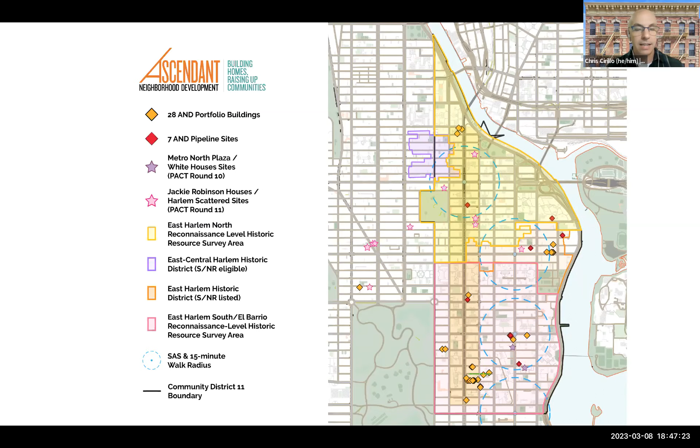And so for the Share NYC project, we are partnered with another nonprofit organization called the Ali Forney Center. Ali Forney is the largest nonprofit provider of services to LGBTQ youth in the country, and certainly in the city.

They provide social services. They run a drop-in center for young people. They operate transitional housing, and they are increasingly getting involved in providing permanent supportive housing for the populations that they serve. And so we have been working with them for several years to develop the proposal for the project that we're presenting this evening.

Just a little bit more about Ali Forney. Unfortunately, we weren't able to have someone from Ali Forney attend this evening, but we will make sure that someone from Ali Forney is here when we're back during the ULURP process to answer any specific questions that the committee may have about their programs and services.

So a little bit of the background about this project.

So the site, 244 East 106th Street, is a vacant lot that Ascendant owns. It was sold to us as part of a cluster of 3 buildings that we acquired in the mid-1990s from HPD through an HPD rehabilitation program. Those 3 buildings with a total of 20 apartments were rehabilitated by Ascendant in the mid-90s and have been operated since then as affordable rental housing.

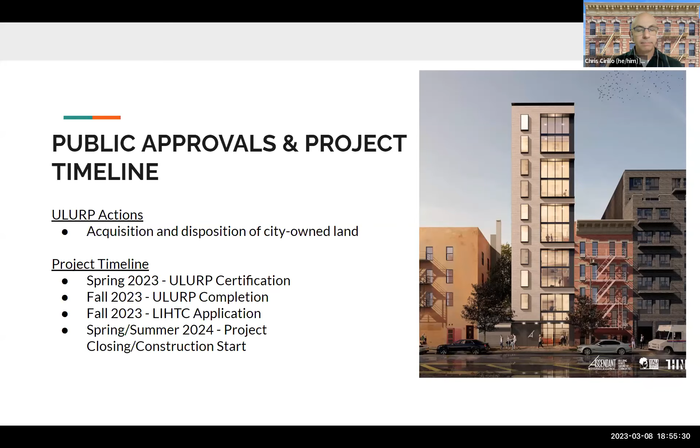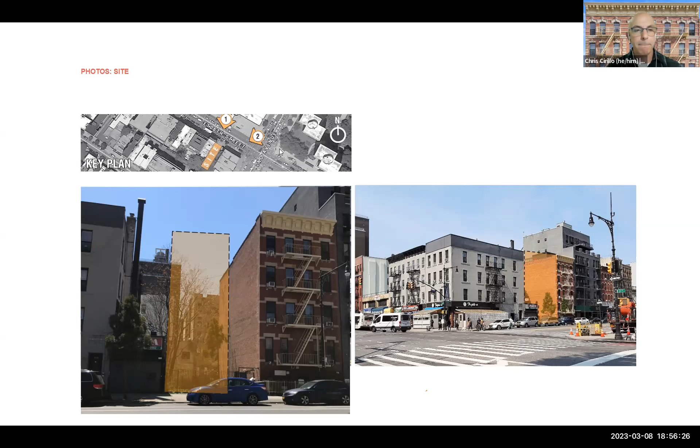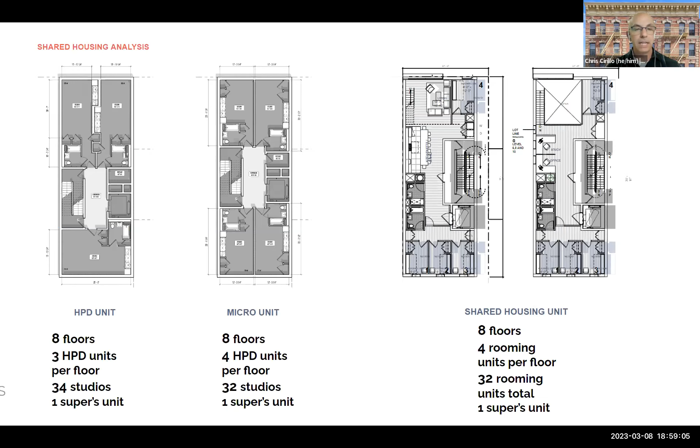So one update since we last presented this project many months ago: there is a requirement for buildings that fall under this category of shared housing. There's a requirement in the multiple dwelling law and the housing maintenance code for a live-in building manager. It's a very specific requirement dating back many decades.

One of the changes we had to make when we first presented the project - we had an additional 4 rooming units on the second floor for a total of 36 in the building. When we realized in our discussions with HPD that we needed to accommodate an apartment for a building manager, we took part of the second floor for that. Then we took the rest of the second floor for the Ali Forney office space, which had initially been on the ground floor, but as we further looked at the resiliency design requirements and moving our mechanical equipment up out of the flood zone - because we're in East Harlem, so almost everything's in a flood zone...

We had to move mechanical equipment up out of the basement. It moved to the first floor. The offices that were on the first floor moved up to the second floor. So we now have 32 rooming units in the building and 1 building manager's unit. So that's one change since the last time we fully presented this project to the committee.

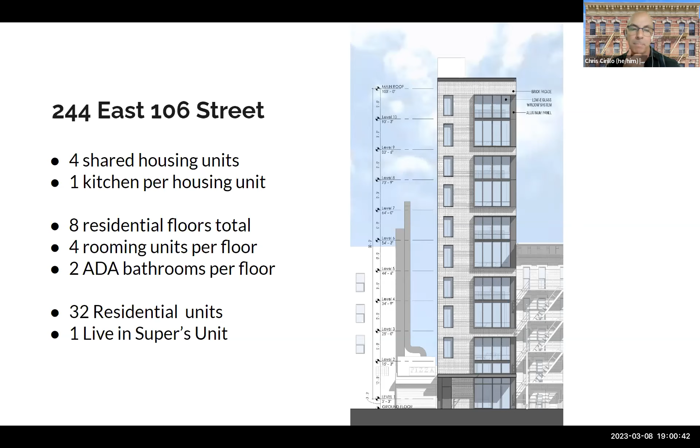We have a high groundwater table and the flood zone, so we've been really working with the architects and our engineers to make sure we're designing the building to be resistant to any future flooding, making sure mechanical systems are placed where they'll be safe, and the building can continue to operate even in the case of a flooding event.

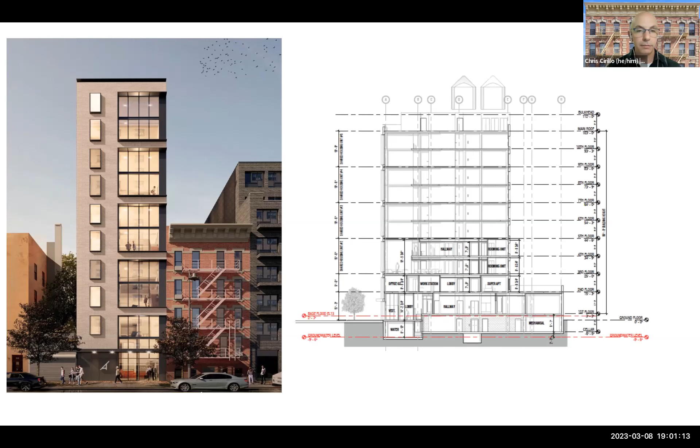At the rear of the building is the amenity space. Because the backyard of our adjacent building at 242 is not accessible to residents of that building - it's never been accessible to them, and because of the way the building's designed, there's really not a way to make it accessible - what we are doing is granting an easement from that building to the new building so that residents of the new building at 244 will have access to a portion of that rear yard. So they'll have their own landscaped backyard space off of the amenity room.

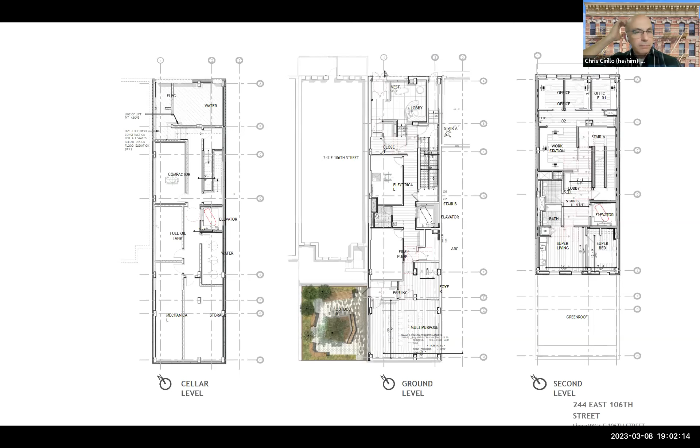This is just a more updated version of what the floor plan looks like these days. We've made a lot of tweaks and changes as we have further refined the plans and moved the project forward over these last couple of years.

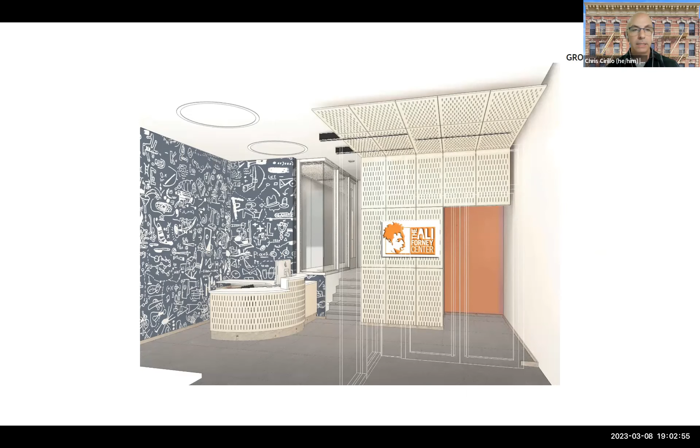Just another view of the lobby space and the main reception area.

This is just one view of how the rear community room can be set up. Obviously, it'll be there for residents to access. We haven't decided exactly how it's going to be furnished, but it'll be a multi-purpose space for resident use - for quiet gathering, lectures, classes, that type of thing. So it can be configured in multiple different ways for however Ali Forney wants to program it for the residents.

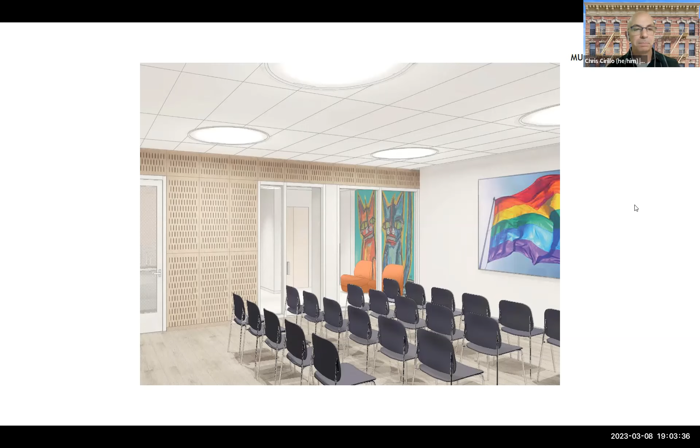This is just a view of the second floor, the Ali Forney office space.

Some renderings show the interiors, how we're planning out the duplex units. This is looking into one of the duplex apartments with the living space on the ground floor and a connecting staircase up to the upper floor. All of the floors in the building will have elevator access, so the connecting stairs are just a convenience within the duplex spaces, but the whole building will be fully ADA accessible. Residents will have access to all floors of the building.

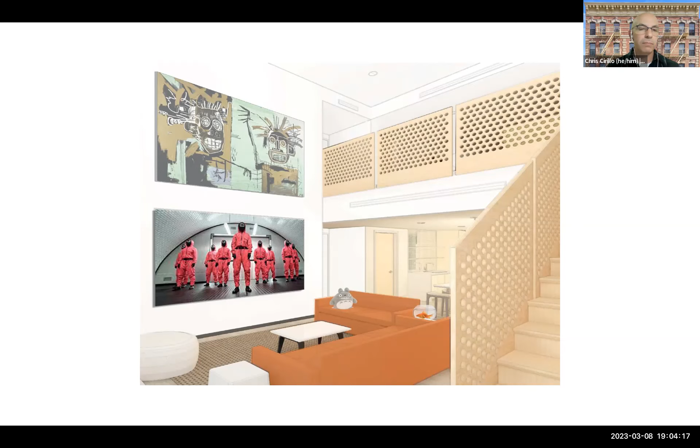Next slide. It's just a view looking from the shared kitchen out toward the living space.

The upper floor of the duplex with workstations and areas where residents can do work in a more social environment.

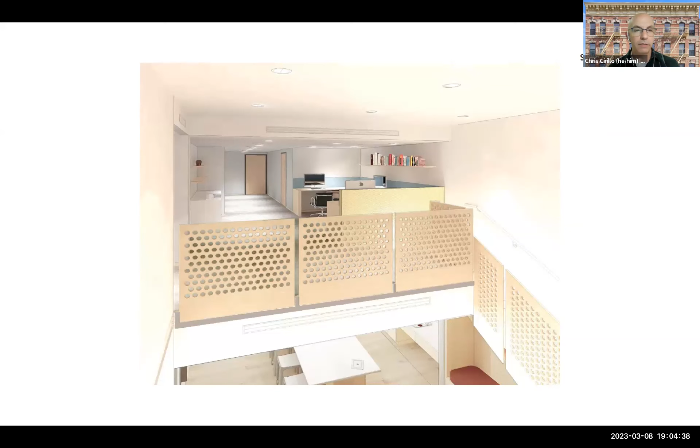Shared kitchen space. Another view.

And then a view of one of the individual rooming units. We're looking at different options for how to furnish the spaces, how to create a lot of storage for residents. We've been talking with Ali Forney about their storage needs and how they provide storage in their current housing space for residents who live in shared housing spaces currently.

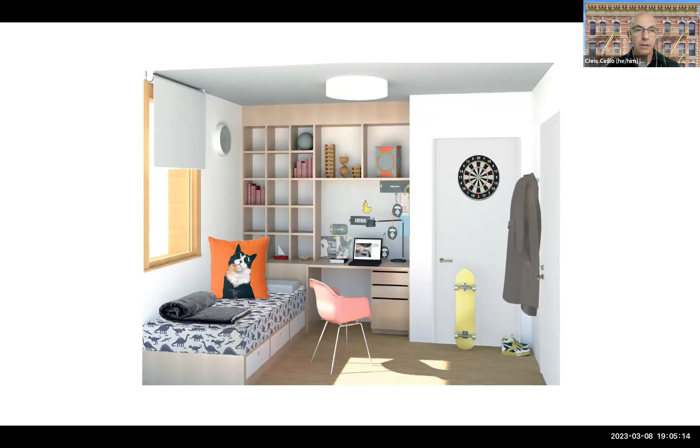Next slide. And this is a view of the rear yard space.

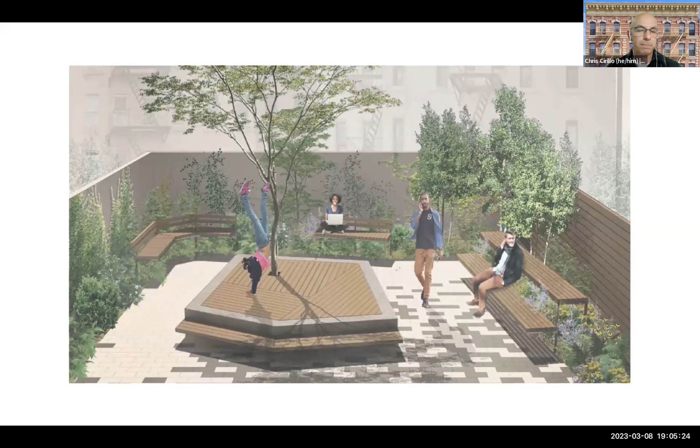One of the things that we've been incorporating into all of our Ascendant projects is public art. So this is a view of the site as it exists today, and to improve the aesthetics of it until we can actually build a new building.

We worked with a nonprofit organization called Groundswell that works with young people and artists to develop public art projects. So this is a temporary art installation on the fence at the site that was co-created by an artist and existing Ali Forney clients who provided the content, the ideas, and the imagery that the artist then took to create this artwork on the side of the space.

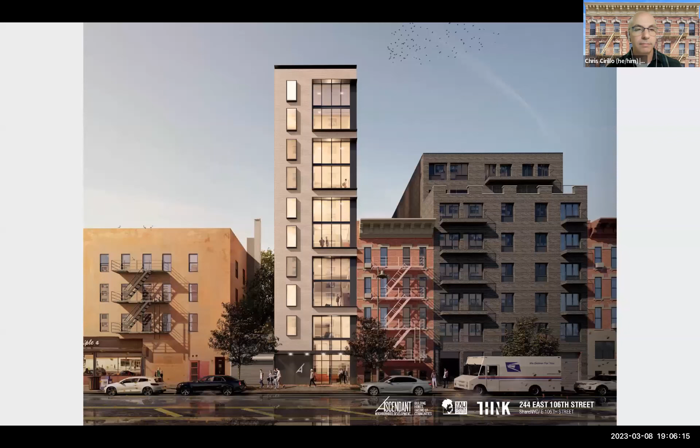And that is the end of our presentation. So happy to answer any questions that you have about the ULURP actions or the project.

Thank you, Chris. Excellent presentation as always. Does any committee members have questions first? Beverly.

Thank you, Chair. Thank you, Chris, for the presentation. I do remember you coming to the board in the past on this project. The question I have is, I know the City Council just passed a new law called the Racial Impact Report, and I'm not sure if you're familiar with it. Would you have to put that in as part of your ULURP application? It's called Local Law 1572B, I think.

My next couple of questions are regarding the apartments. You said now you have to have a unit for the manager and a unit for the super, so that's two types of units you'd have to have. And in regards to the backyard, 242 doesn't have access, and you're going to have access from the new building to the backyard. Since you expanded it, would the people from 242 still be able to use that backyard? And my last question is, these resident units are only for single people, correct? That's it, thank you.

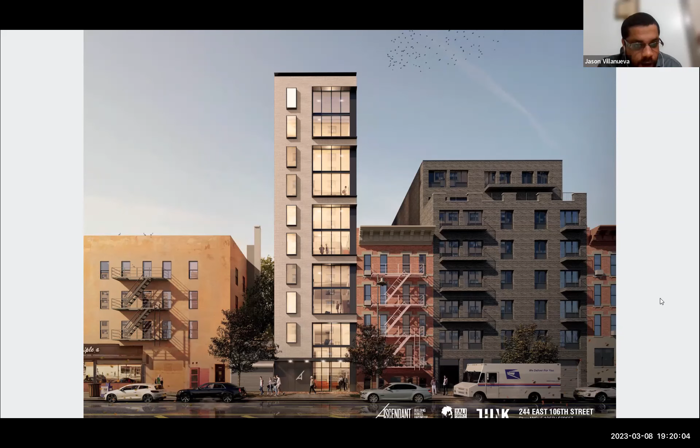Jason, happy to stay a little bit longer. I have some daddy duties tonight, but I can stick around for a little bit. Even if it's probably more for concerns relative to other projects, it maybe shows the committee that HPD is here and present, and may allow other opportunities for us to discuss district-wide concerns. So thank you, Philippe, and appreciate you sticking around for us.

No problem, so we're going to continue moving along. This is just an informational update. I think I made a mistake on one of the pieces of paper saying we were going to have to take a position on this item, but the long and short of it is it's an informational presentation by the New York Public Library's application, which I've been told has already been approved. The update is on the application to the Landmarks Preservation Commission related to the renovation of the Aguilar Library branch.

I believe, Anne, I think... Yes, I'm here. I'll just introduce the team, and our architects are going to share their screen with the presentation.

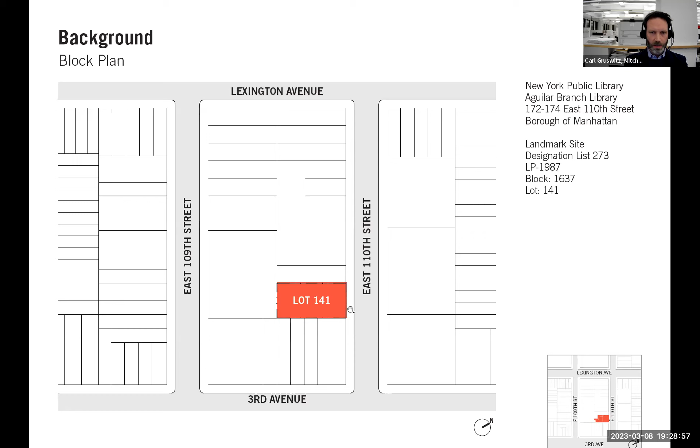For context, the plan is a little bit rotated here. 110th Street is to the right. The entire lot is an individual landmark, and this is the third floor plan. We're trying to improve the existing egress, second means of egress out of the community room on the third floor. We're currently on the left side plan here.

You have to cross the roof outside and then go down a fire escape in the back of the building and down to the basement. What we are proposing to do is have an enclosed corridor, so it's climate controlled, and we are also improving the south stair as well, creating a more direct connection for the public.

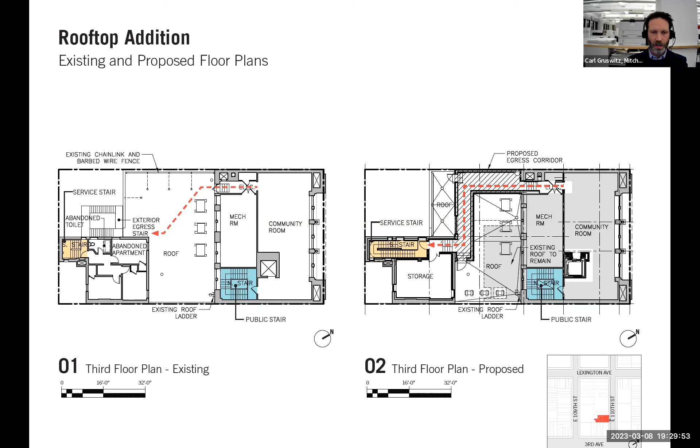And basically, because of that, this particular wall, which you'll see in several other slides, is the one that is viewed a little bit from the northwest side of the building and not visible from other portions around the block. But I'll show you that in the next slides.

So in the left image here, the section - this is where the third floor community room is. You walk out to the roof, again, descend down the fire escape. On the right is the proposed corridor connecting to that back area, and then down the stairs to the building, enclosed.

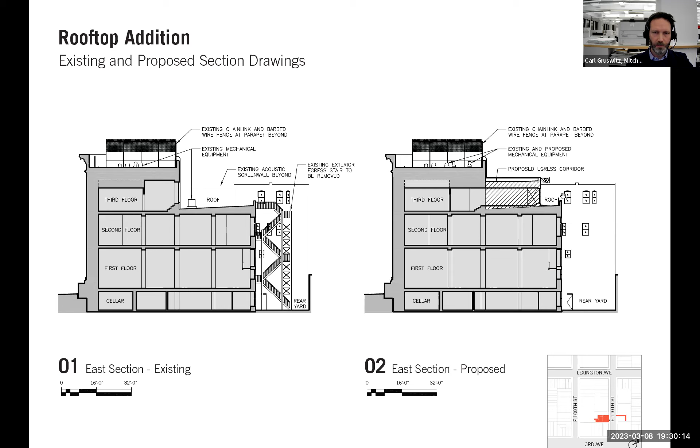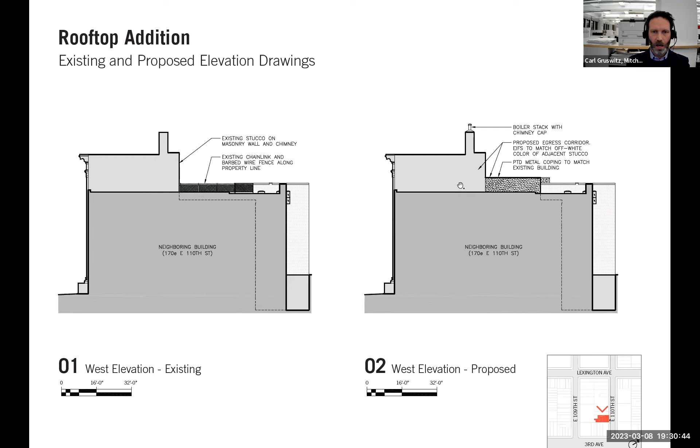The next are the elevations from the west. This is an existing stucco wall of the existing facade along the west facade here. This is a chain link and barbed wire fence for security reasons on the left side. And then our corridor is a stucco enclosure to match the existing - we're going to match the exact same color, so it will not be so visible.

LPC requested that we provide sections at different angles - one a straight-on view from the street, in which case the addition is not visible from eye level across the street on 110th Street. This is an oblique view. In this particular location from the northwest, the addition is not visible.

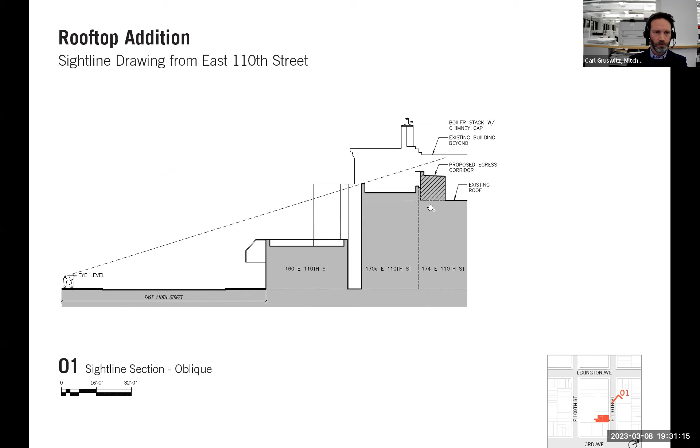This is probably the easiest one to take a look at here, again matching the existing stucco facade and coplanar with it right along the party wall. And then just different views from different perspectives.

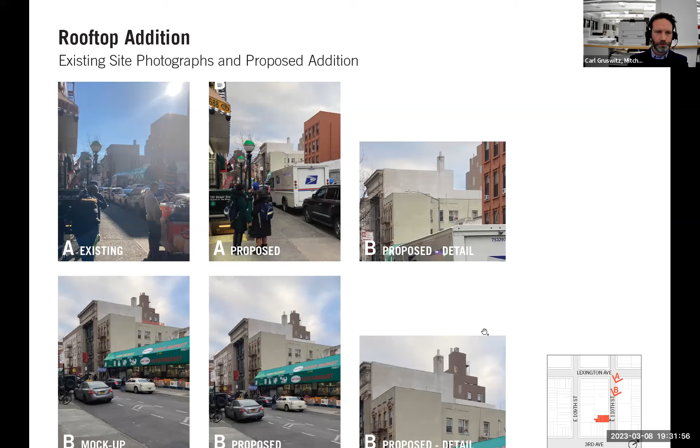Thank you, Carl. So we're here to answer any questions that anyone might have. Thank you for your presentation. Jessica Morris, Beverly.

Thank you, Jason. Can you hear me? Yes. Okay, thanks very much for the presentation.

I know some of the requirements for landmarks, you have to show how you're not impacting things, and I think you've done that very effectively. Furthermore, I think Carnegie libraries generally are very special places, and this will continue to stand, I hope, for a very long time as one of those special places, making it so through its commitment to use and providing a point of service through the improvements you're making.

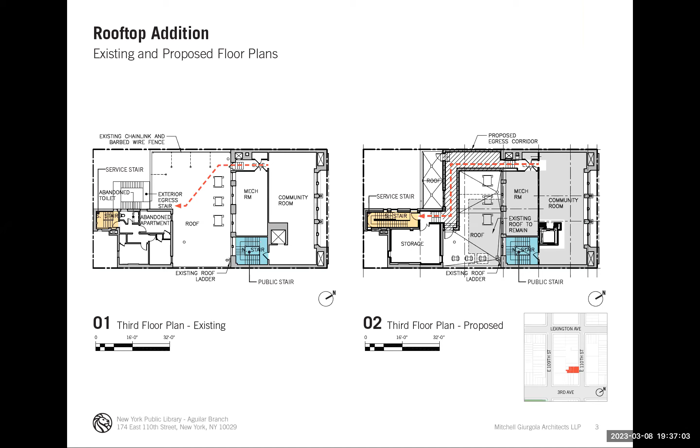All right, thank you so very much. You're welcome. Great discussion, excellent presentation, thank you to the team at the New York Public Library for providing an update.

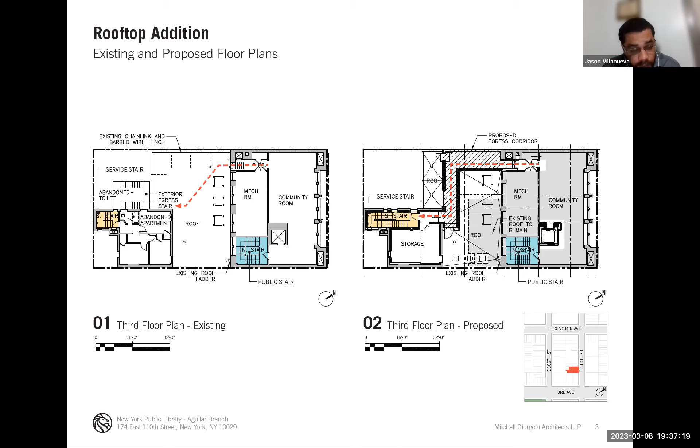You probably covered it and I apologize, but one question - do you guys have an anticipated construction start? Yeah, so we're planning to start in June of this year, pretty soon. Excellent, all right, so we'll see you, I guess, for a follow-up.

Prior to me closing, let me just go to Warren James. Hello, congratulations to Mitchell Giurgola, welcome to East Harlem. And to the library, thank you for keeping an eye on this beautiful building.

What I think Jessica brought up was the issue that the supermarket is a single-story taxpayer building, and sooner rather than later it will go, and the existing zoning will make that building anywhere from 6 to 10 stories, mirroring the building across the street. So I would not be concerned, or perhaps that could be further emphasized to landmarks, that what will be visible will become invisible because of the soft site adjacent to it.

The other issue I want to bring up for New York Public Libraries to consider as soon as possible: the lower portion of the facade facing the street has deteriorated over the years. It has stone that is very soft. Before much more time goes by, can the library begin the process to ask for capital dollars to repair and re-establish the lower portion of the pieces that stick out into the sidewalk? That entire lower portion, let's say the first 10 to 15 feet of the facade facing the sidewalk, has deteriorated substantially.

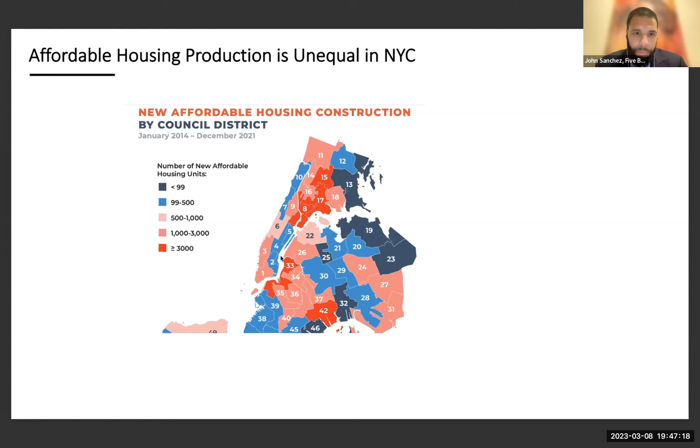So what we're advocating for is we want to change some of the state laws that prevent housing from being built. We want to see flexibility for offices to be able to convert if they choose, allow the city to determine where a higher FAR cap is suitable. And if there's going to be office conversions, we want to make sure that there are permanently affordable units as a part of these conversions.

What we're proposing, and what the city is proposing to the state, is that there be a uniform threshold. If the building is built before 1990, it has the option to convert. Not a mandate, but just having the option to convert empty space into apartments.

In terms of the type of offices that would convert, it varies. There are smaller type office buildings, more seen in Tribeca or Soho, with working windows—they're the easiest to convert. Type 2 and type 3 are the office buildings you're more likely to see in Midtown, near Grand Central or Times Square. They're more difficult to convert, but they yield more units. We think a combination of all 3 types would have the option if the state allows it.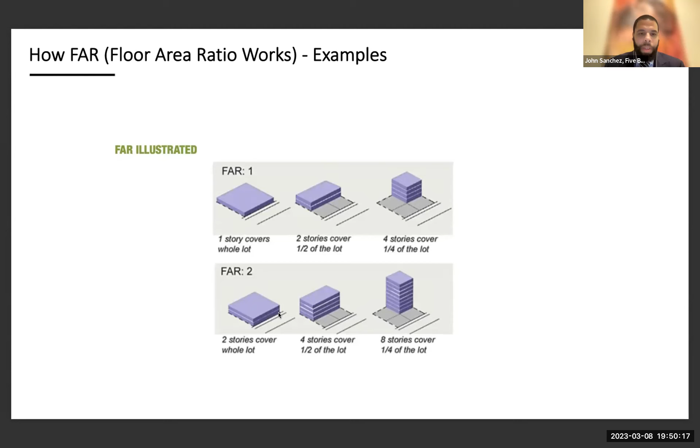These are examples of buildings that could not be built today because they exceed the cap. I'll start with my neighborhood in the Bronx, 1749 Grand Concourse. This building exceeds the state FAR cap. It couldn't be built today, no matter what.

The building on the right, West 75th Street, it's not that tall of a building. This used to be an all SRO building. Now it has rentals. And it's important to know that a lot of the buildings that were grandfathered in before the cap was implemented, more than half of them are less than 20 stories.

So even if the state lifts the cap, the city will still determine where it makes sense. It would go through the ULURP process, community board process, et cetera. It just allows the city to make that decision rather than Albany.

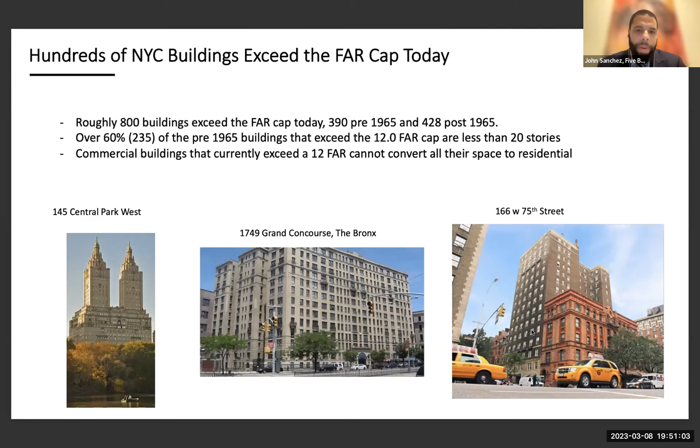In terms of how many units we think could be created through conversions, we have a good guide. The state and the city did this already with the 421G program, which was exclusively for Lower Manhattan. It produced around 13,000 units. The big difference is that this had no affordability.

We want to see a new program that has a tax incentive for affordability as a part of the conversions. And we think 20,000 units could be created over the course of a decade.

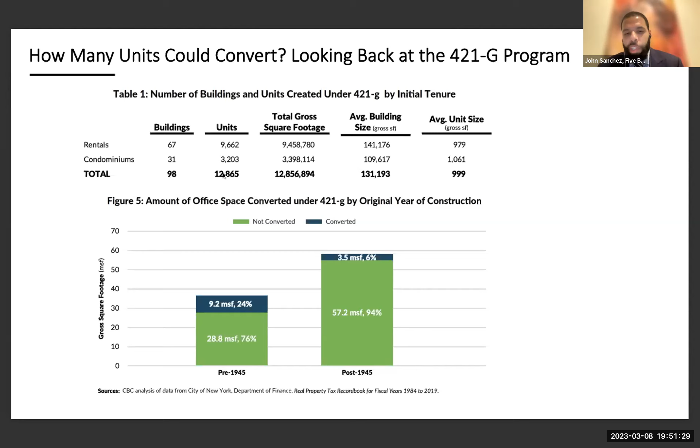Again, just comparing the two programs, the program we're proposing would have about 20,000 units. It would be permanent affordability even when the incentive expires. The affordable units can't be converted to condos or co-ops. And the entire city would be eligible.

Even though most of the conversions would be in Manhattan, there are pockets in the South Bronx, downtown Flushing, Jamaica, Queens that have expressed interest.

And another important thing is that the governor's budget proposal actually mandates that for the affordable units, 50% of the affordable units have to be 2 bedrooms or more. And no more than 25% of the units can be 1 bedrooms or smaller.

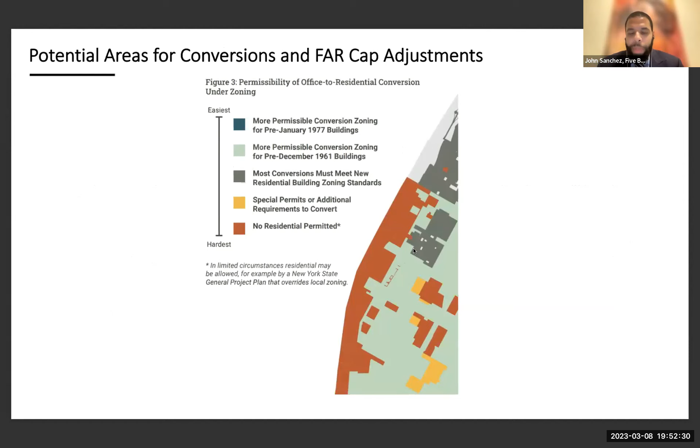Again, this is just a short map showing where most of the conversions would happen. And again, it's mostly Manhattan south of 96th Street, but even more specifically, south of 59th Street.

Also, if there's more eyes on the street, that helps with public safety, more business for the local businesses and restaurants. And of course, people from across the 5 boroughs can work on these construction projects.

So with that, I'm happy to answer any questions from the board. Thank you.

Excellent presentation. Thank you, John. Is there any questions from the members of the committee? Jessica Elliott.

Hi, thank you so much for your presentation. Just curious what the impact would be if you are aware in East Harlem. I know we don't have a ton of office space to convert, but if you have any insight on what this could bring for our neighborhood.